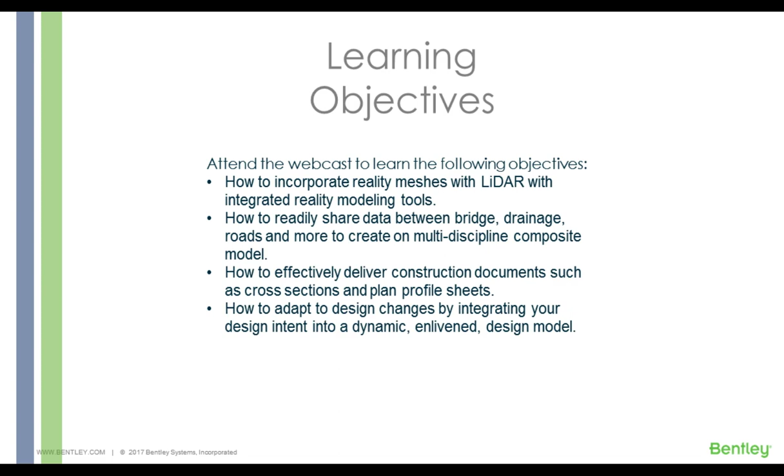Mo, I'll hand it over to you. Thanks, Bob. Well, first off, thank you all for joining us today to learn a bit more about the upcoming release of OpenRoads Designer.

OpenRoads Designer is basically taking the best concepts of our legacy products, InRoads, Geopak, MX, and combining them with the latest innovations to create our next generation detailed roadway solution. We'll take a look at the benefit of designing with reality context, rapidly modeling our design intent, integrating multiple disciplines, adapting to change, improving project deliverables, and easily visualizing our designs.

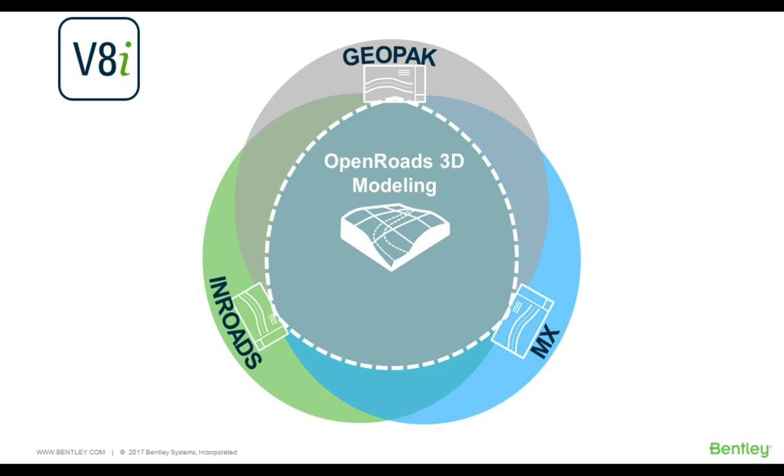Today, many of your organizations have to procure, deploy, and train multiple Bentley offerings to meet deliverable requirements. As you see in this graphic, OpenRoads Designer will be a single license, a single installation, a single solution that will simplify your process. OpenRoads Designer, above and beyond the premium civil products I just mentioned, will also include Descartes capabilities, the new gINT civil tools, SUDA, as well as MicroStation.

Joey will get in a lot more detail. We mentioned the critical business issues in the description, so he'll get into those and highlight them, but I want to discuss a few of those and how they support industry direction.

The first one we're going to talk about is design with reality context. You see big data, expanding data types, innovation drives change. The availability of data, the expansion of types of data, and one of the bigger ones is actually the ability of software and hardware to consume that data is really changing the process. And that last bullet, innovation drives change — one of the key things I thought about is, if it ain't broke, don't fix it. I know all of you probably do have some clients that are slow to change, but the industry is changing, and this innovation, design with reality context, is having a huge impact.

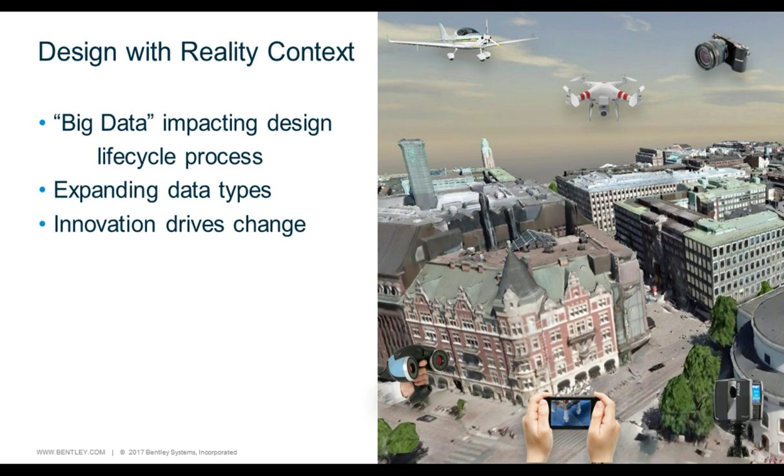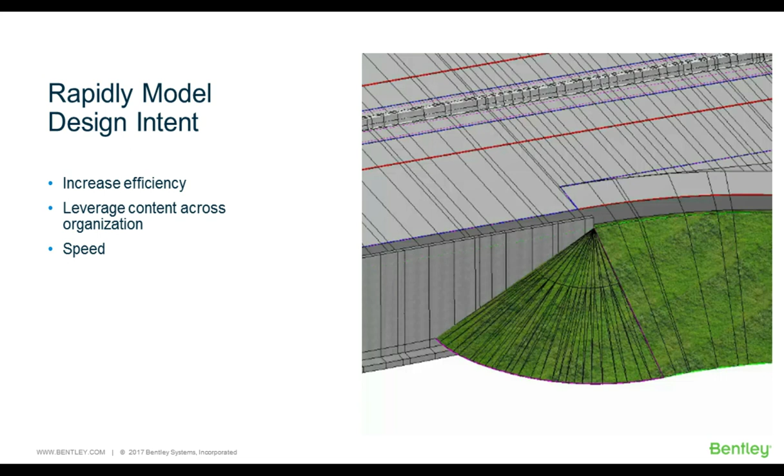Rapidly model design intent — this one is absolutely a necessity. A lot of people are concerned that there's a perceived impact to cost and schedule associated with 3D project delivery. Again, Joey's going to get into a lot of the detail of this, but this one again is an absolute necessity.

Integrating multiple disciplines - we've already talked about reality data, SUDA, the GINT civil tools - but Bentley's common modeling environment will also allow integration with things like bridge data using OpenBridge Modeler, rail, as well as buildings. This will ultimately improve collaboration, not only within an organization but with subs, owners, etc. It'll also reduce risk and find early conflicts, all benefiting the project through that integration.

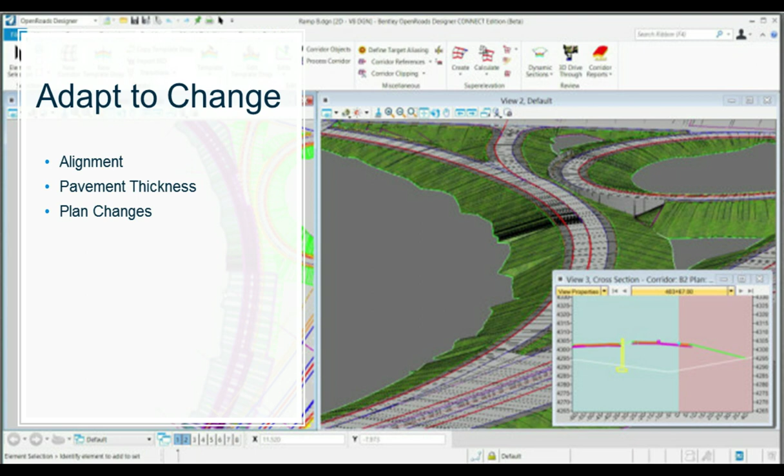Adapt to change - to me this is an extension of rapidly modeling design intent. But the big thing here is that it offers the ability to make changes without circling back to the beginning. So you're not having to redo work; you have to be able to adapt a change quickly.

Another big critical business issue is improving project deliverables. Regardless of whether you're working on a traditional design-bid-build project or alternative delivery projects such as design-build, CMGC, P3, etc., the deliverables - or rather the data - are beginning to shift from what we consider 2D plan deliverables to being focused on the data. That will be critical to the delivery and success of the project. We know plans will still be required, but some organizations have it in their vision as early as 2020 to receive no 2D drawings.

And finally, visualize designs - we need to be able to do that easily, quickly, and it needs to be the actual design visualized in real time. The cost to do some of these visualizations, and why they're being done, right now the focus is more around collaboration and understanding the problem, and again we believe that's a critical business issue.

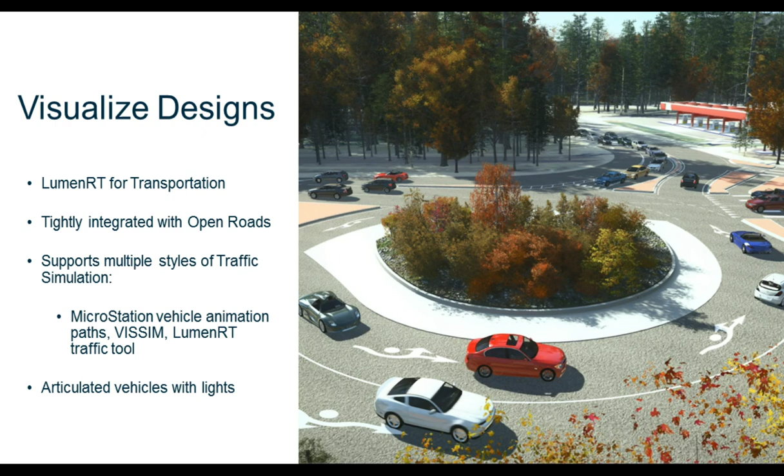So in an organization working between, say, your roadway group, your drainage group, and your structural group, we have to improve that process not just across phases but across disciplines. I've just covered these things at a very high level - these are some of the critical business issues we're focused on. It's all related to the industry, why we're doing it, why it's important to us, because it is happening. Now I'm going to turn it over to Joey.

Joey's going to dive a lot deeper into these critical business issues, and you'll see with OpenRoads Designer what Bentley's done to move that forward. So Joey, I'm going to turn it over to you. All right, thank you Mo, and thank you all again for joining in. As Mo said, I'm going to cover a little more of the technical side related to the business issues he's discussed previously.

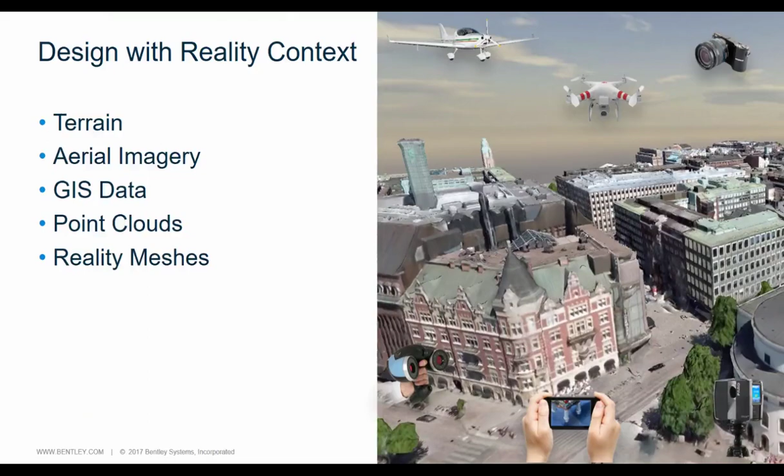So we want to first talk about designing with reality context. And reality context, if we look at that in a broad sense, really includes a lot of the things we've done in the past. It includes our terrain model of existing conditions, aerial imagery, GIS data, point clouds, and even reality meshes.

So OpenRoads Designer is built to be able to consume existing data from multiple sources so that you can access it, consume it, and utilize it when it comes to designing. You'll notice within OpenRoads Designer in the top left we have a menu we term the workflows. The breadth of functionality within OpenRoads Designer is quite large in order to provide a series of workflows so you can work on a project from beginning to end.

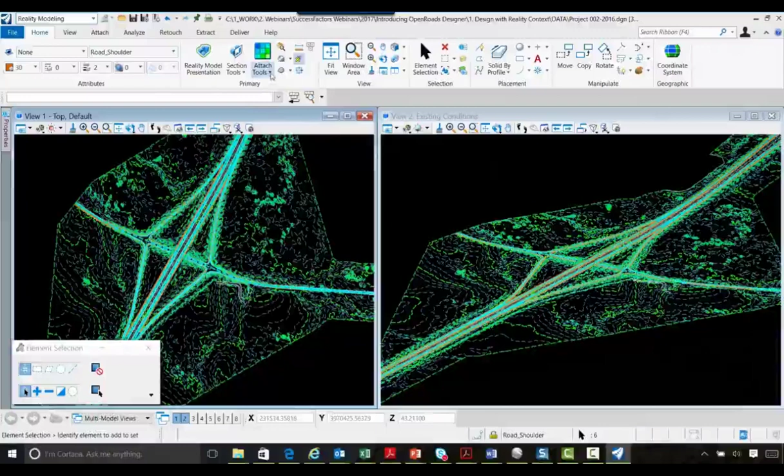Now we're focusing again on the reality modeling side of things, looking at some basic examples of how OpenRoads Designer lets us consume data. As a project's beginning, we have to have context of what's actually there. You can see the terrain model on the screen of the interchange where our project is going on, in the 2D view on the left and the 3D view on the right. As Mo mentioned, OpenRoads Designer and the industry at large has noted key benefits in working in 3 dimensions.

Now we've got 2 separate views. In the left-hand view, we're going to turn on aerial imagery. And all of this, again, is within OpenRoads Designer, and we're building the foundation of our project.

We see the terrain model. We've added in aerial imagery as well for a little more context and definition, so we've got aerial imagery in the 2D plane. Notice our 3D model simply shows the terrain model, so we're separating the 2-dimensional data from the 3-dimensional data. In one sense that's extremely useful and powerful, so you can understand the data easily and look at it in 2 dimensions or 3 dimensions in different ways.

Now we'll continue adding data. We're going to reference in a shape file so we can see the property lines, the right-of-way, and the boundaries related to this interchange. Many of you have probably experienced this quite a bit: as you begin a project, you're always on the lookout for data, whether property lines, terrain data, or imagery, in the form of shape files or other data types. OpenRoads Designer allows you to consume lots of data from lots of sources so we can put that data together in context to get a good picture of the existing conditions. So we've added in the imagery, we see the terrain model, and we've referenced in a shape file of the property within that area.

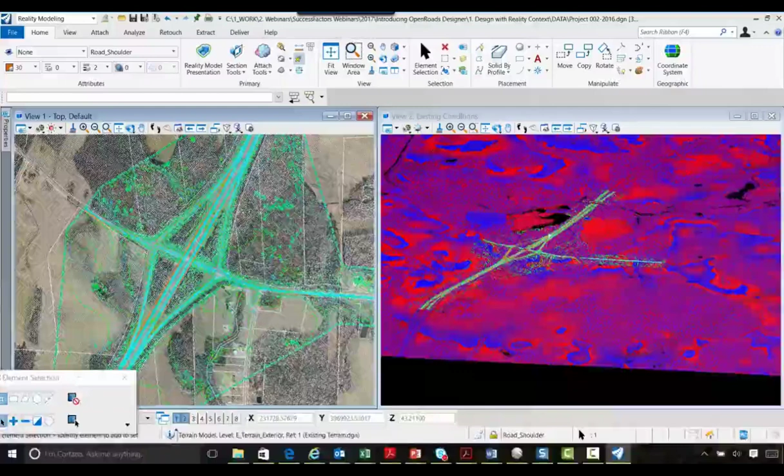Now we're going to continue and add in more along the lines of thinking 3D, so we're going to add in a point cloud file. The point cloud tool set is directly in OpenRoads Designer, and functionality for advanced tool sets, such as draping line strings and things like that, is included as well. Notice on the right-hand side we have a representation of the point cloud that's different than on the 2D view. So in the 3D model view, again, we can separate the data and get different perspectives of the same data so we can understand it better.

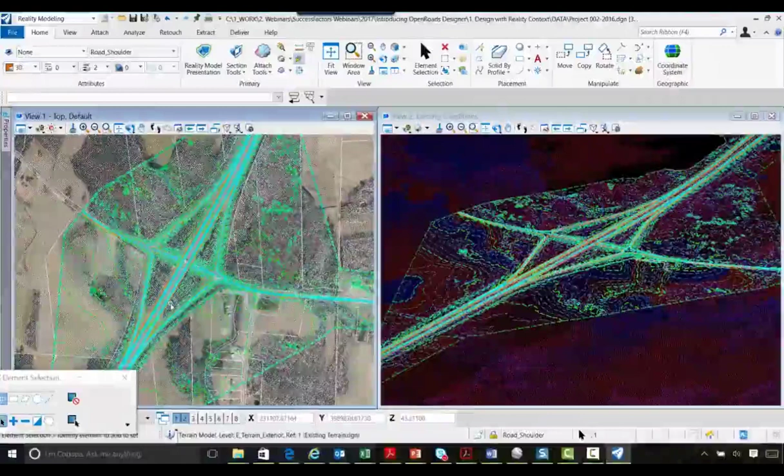Now we can just modify the views independently of one another so we can change the perspective a little bit to understand it better. So we've got that LiDAR file, point cloud is now attached. As I said, we can modify the views independently, so we turn off view 1, but we let the point cloud remain in view 2.

Now, in addition to just attaching a point cloud, there are presentation styles, so based off of that point cloud we can modify how it's displayed. Right now we're displaying that point cloud based off of an elevation range. You'll see here I'm making a modification of the data, and you'll see that change in the right-hand view as I modify the elevation difference and the colors as well. So we've taken that point cloud, brought it into OpenRoads Designer, and now we have the ability to analyze it and begin to understand maybe where the high points and low points are.

All that data is being consumed and put together so that we can understand it. So we've got imagery, we've got the terrain model, we've added in shape files, and now we are looking at the point cloud as well, and we can see that in the 3D view. We'll zoom out and fit the view just a little bit.

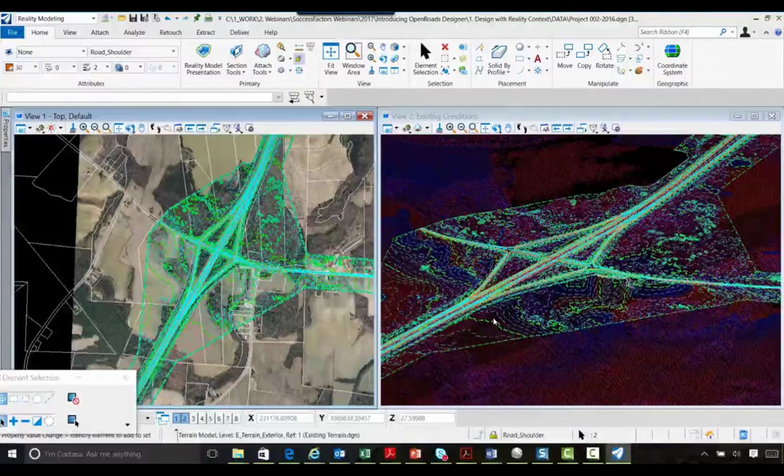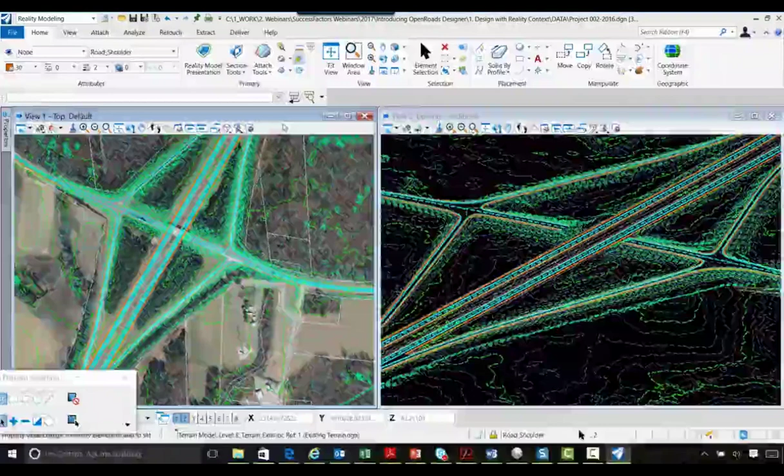Now we're going to add a little bit farther, we're going to add a reality mesh. The reality mesh is output from Context Capture. If you're not familiar with Context Capture, that's another product from Bentley where you can take imagery, either overhead from an aerial, or imagery taken from your cell phone, if you want to take shots of a head wall or something like that. Context Capture processes those and creates a reality mesh, which we are attaching here. Reality mesh is a .3mx file, so we just add that in with all the additional data.

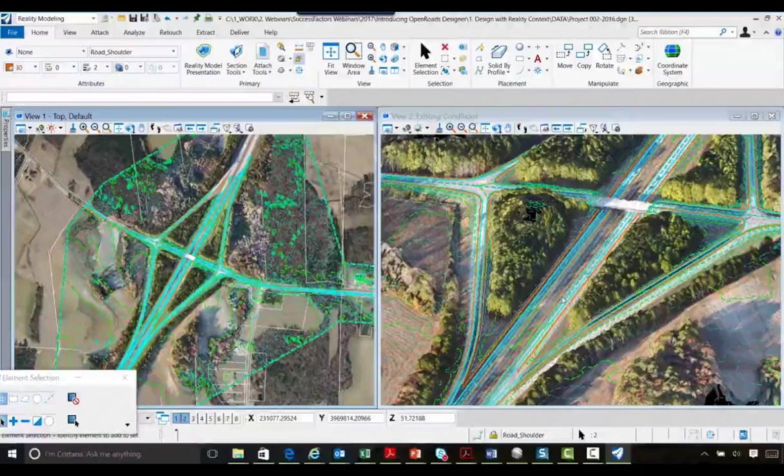We reference that reality mesh in, and now in both views we see the results. On the right-hand view, you can see the trees, the fields, and the earthwork around it, and we can just rotate that view to get a very robust, dynamic representation of reality at our project site. That again is reality mesh. The key thing here is being able to consume and associate all of this data together effectively, and not have to spend time manipulating, searching, converting, and translating data in order to get it all together.

When it comes to critical business issues, being able to rapidly model our design intent is key. Now, there's a perception that modeling requires a lot of extra effort and extra steps. OpenRoads Designer is built to model as you design, so as we model, as we design, they're really one and the same.

We'll take a look at some examples where design intent is included across all of OpenRoads, including alignments, corridors, intersections, drainage networks, and civil cells. The key thing to understand is that within OpenRoads Designer, and really this is a transition of the industry itself,

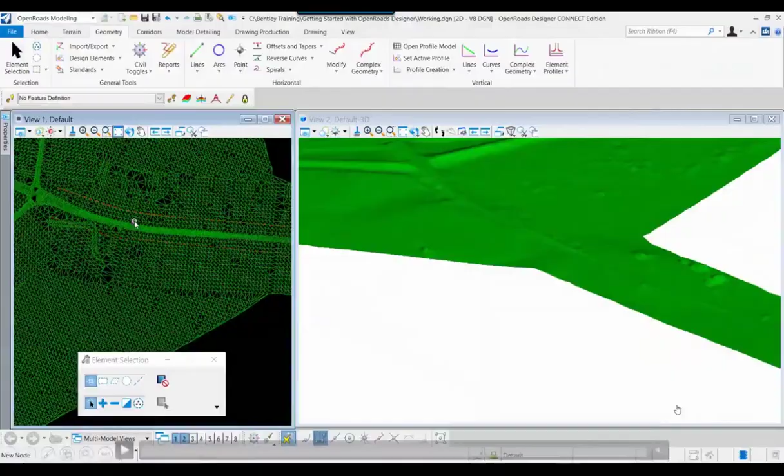modeling is not a post-process. Designing and modeling are the same thing. So in OpenRoads Designer, the intention is to model while you design or design while you model. They are really one and the same.

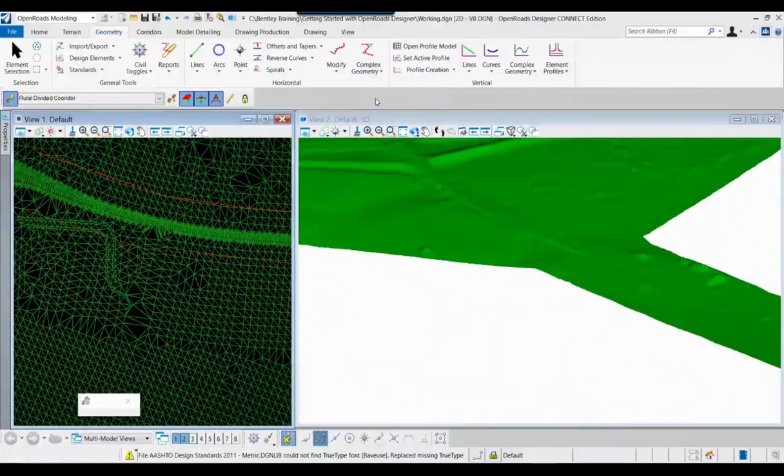Let's take a look. Here we have our terrain model, in the same area as before, and we're going to quickly model a 4-lane divided highway. On the left-hand side you can see the existing roadway, and we're going to create a 4-lane divided model, a corridor over the top of that. We want to be able to do that quickly, see it, evaluate it and analyze it so we can make engineering decisions as we create, as we design.

So here I'm quickly getting a centerline representation along the existing roadway. You'll notice I'm laying out the horizontal, but I'm producing the model at the same time, taking advantage of OpenRoads settings and feature definitions where I create the horizontal, vertical, and roadway corridor simultaneously. Now over in the 2D or 3D view on the right, we're able to see the representation of the model.

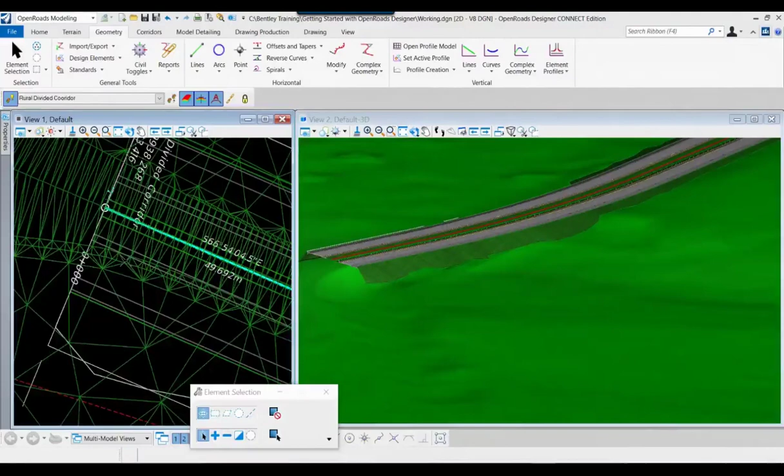We're not finished - that model is live and dynamic, so as an engineer I have the ability to make modifications. Here you see me modifying the start station a little bit - I just graphically move the location of the horizontal alignment and the corridor updates. The same for the horizontal curve - if I needed to modify that curve, I just graphically moved it, and you can see the representation of the model changing with it as well.

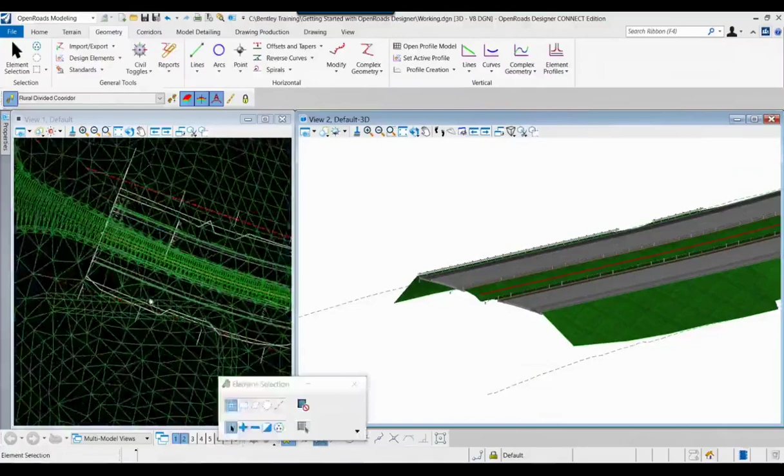As an engineer, as a designer, I want to see the results of my design quickly so I can analyze and evaluate it, and that's what we're looking at here. So I've turned off the triangles in the right-hand view. I want to clearly display those in multiple ways so I can analyze and make my engineering decisions.

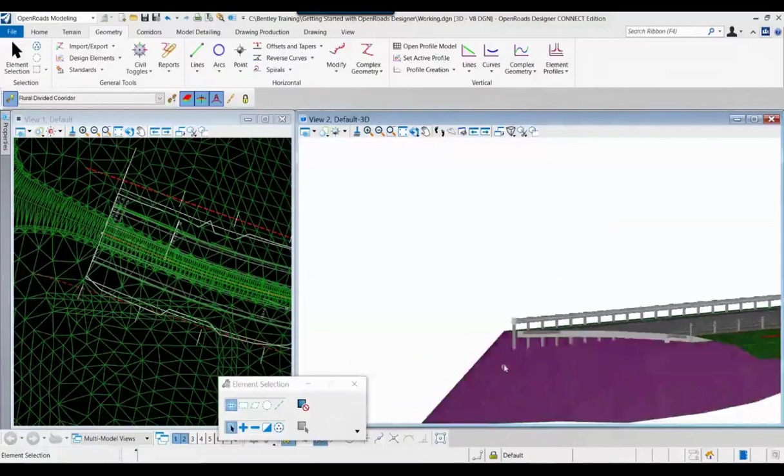If we zoom in on the model on the right, you'll notice there's guardrail and cable barrier present in the model. This is a very robust model - there are a lot of details included here. Notice too that the pavement buildup of the model is comprised of components - each of those pavement layers represents the constructible and quantifiable components of that corridor.

Interpretation and decision making is what we do as engineers and designers. So I'm able to dynamically and interactively work between the views to interpret, design and modify. We want to be able to convey our design intent within the model.

So I'm going to make a modification here. I don't like that steep slope along the left-hand side of the roadway. I've opened up the cross-section view, and I want you to notice that the cross-section view allows me to make decisions, to interpret that roadway corridor.

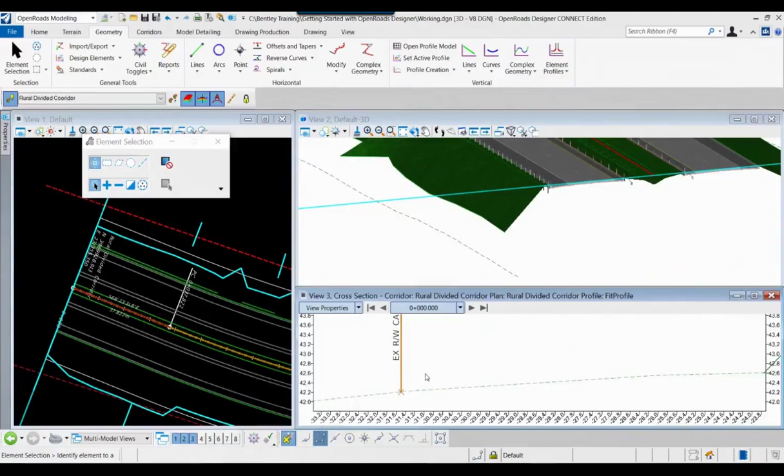I can see the barrier, the cable barrier, as well as the guardrail. Even the existing right-of-way is displayed in that cross-section. So I'm able to see that and make decisions from it. Now, in looking at that, I want to make some modifications, which we'll see later.

One of the key advancements within OpenRoads technology and OpenRoads Designer is using civil cells. Now here, I'm going to place an entrance or a driveway.

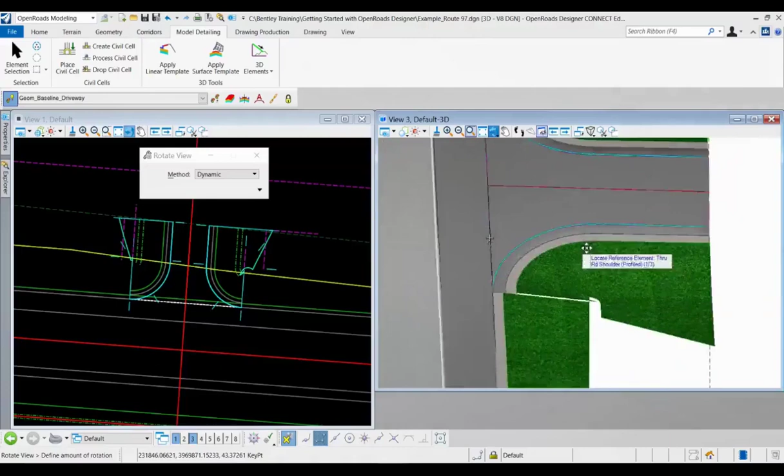I'm using a civil cell based off the references in my model, and I'm going to place that driveway entrance. We're able to place this quickly using that civil cell, which is really a pre-configured design element that carries and maintains your design intent. You see that entrance being placed over in the 2D view on the left as well as in 3D on the right, and it is now in the model.

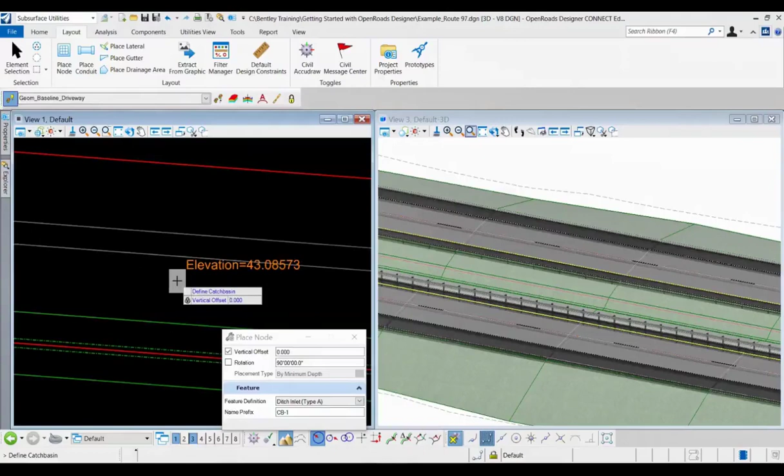Now we have that entrance associated with the corridor we created previously, all within a single design model. To take this a step farther, when it comes to modeling and designing and carrying our design intent, no project exists by itself. OpenRoads Designer has tools included for the subsurface utilities and drainage analysis tool set.

I'm going to take that same corridor and place a drainage inlet, and you can see that on the screen. On the right-hand side in 3D, we can see that inlet being placed in the bottom of the depressed median. Now I'm going to pan over to the north side and place the outfall structure.

I'm using the subsurface utilities within OpenRoads Designer, and I'm going to pick the proper head wall. It's got a 3-to-1 slope on that fill slope, and then I'm going to move over. Now I'm interacting with the roadway corridor.

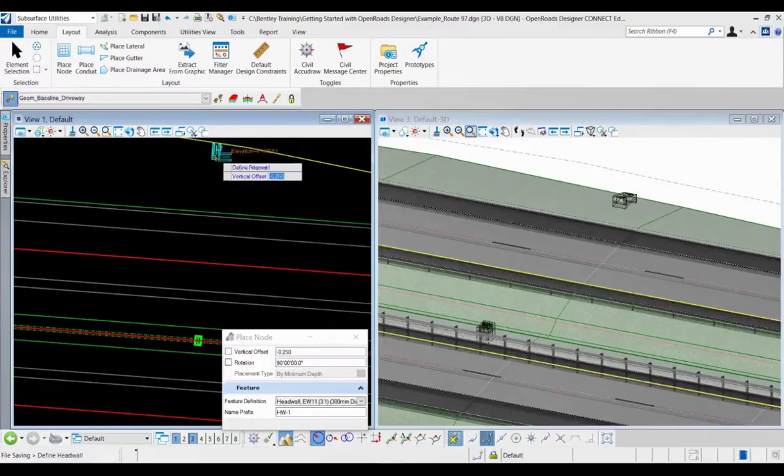When we talk about multidiscipline modeling, we're talking about being able to utilize data from other disciplines, such as drainage using our roadway corridor. Our drainage structures are relative to our roadway surface, so they're working together. We have the inlet placed and we have the outfall placed.

Now I'm going to connect them together with a concrete pipe. Again, I'm laying things out in 2D, and we see the results in 3D. So I'll connect those up, and now we can see those elements within our model.

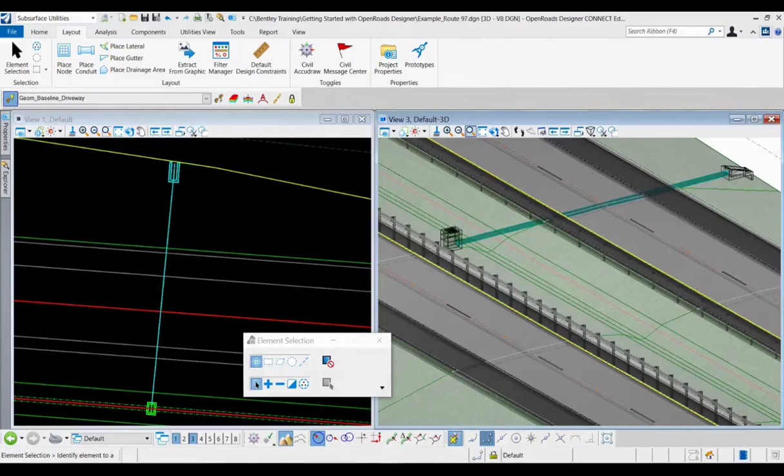This leads us into our next topic: multidiscipline integration, being able to integrate model data or design data from multiple disciplines. In this case, we placed drainage structures relative to our roadway design, and that data is not only integrated with it, it's interacting with it.

Let's take a look at integrating multiple disciplines in OpenRoads Designer. We'll look at several examples, including geotechnical data, bridge model data from OpenBridge Modeler, as well as drainage. This could include buildings and other structures as well.

If we're making design decisions within a modeling environment, it's important to point out that OpenRoads Designer really is a common modeling environment, so that we're able to exchange data and access and utilize that data when we make design decisions. That's really the basis behind integrating multiple disciplines.

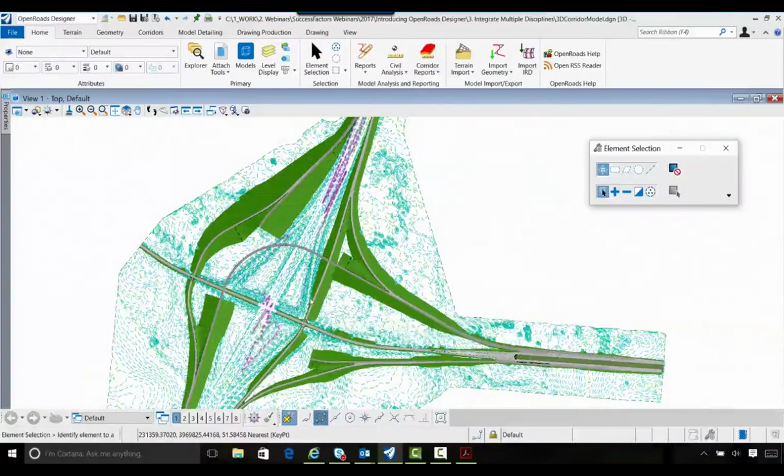Let's take a look. Here we are. We have just another example: the interchange here within the area that we've been working. You can again see the terrain model, the roadways, and the proposed roadway changes. We can rotate that up and take a look at it. You'll notice a couple of things.

Within this project, there are multiple keys or disciplines that we need to evaluate, and the first of those might be geotechnical data. OpenRoads Designer contains a geotechnical tool set called gINT Civil Tools. You can access gINT data and bring it into a DGN in three dimensions if you want. I'm going to reference in some gINT bore log data here into my design model.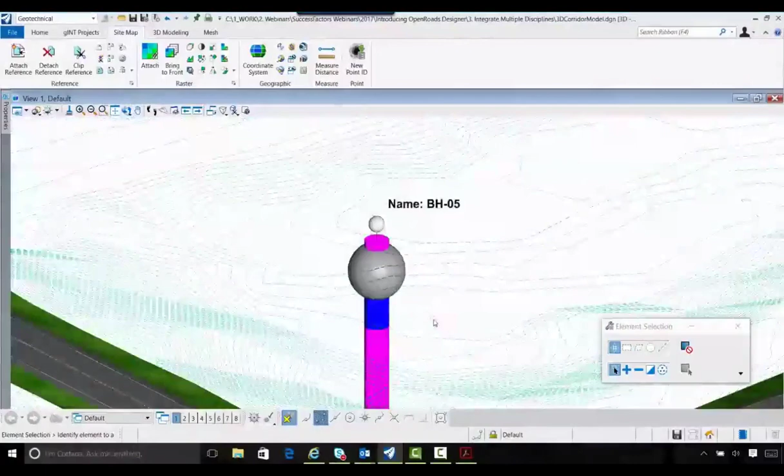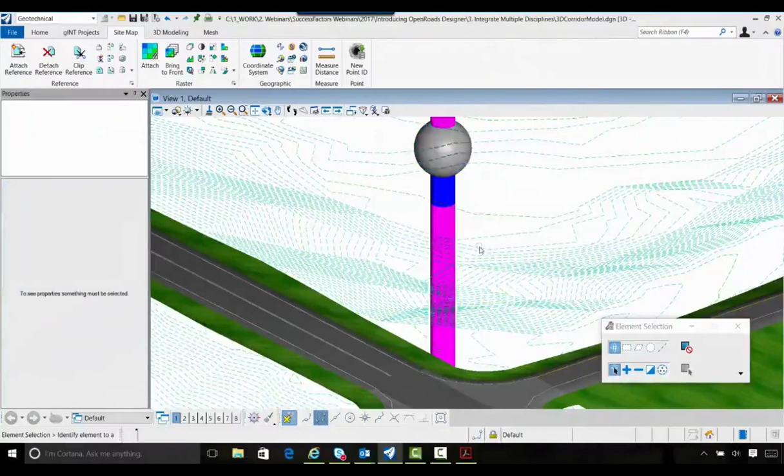Notice everything is geospatially located. So when we begin to bring gINT data in, it's geospatially located, and it's located correctly in elevation, so the elevations of all those logs are correct based off the material that it is. You'll notice you can select those bands, and the material is carried along with it. Rather than bore log information being on a series of paper sheets or PDF files in someone's desk drawer, we want to make that data accessible and useful directly within the model.

It's really a comprehensive modeling environment, so we have the ability to get a full picture of our project area and the engineering data that we need to evaluate going into it. Again, geotechnical data, we can bring that in. We also can access 3-dimensional bridge data from OpenBridge Modeler.

And so now I'm just going to select an OpenBridge Modeler bridge model and reference that into my project as well. And so you see the bridge being placed in the model. You can see that now.

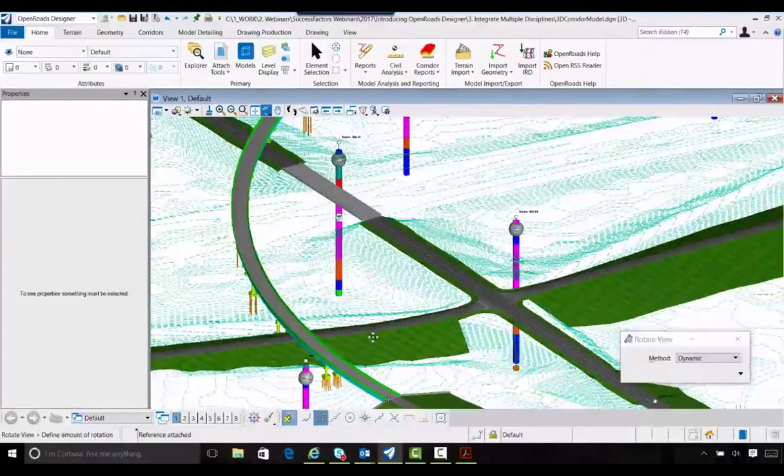Now at this point we have the existing terrain displayed, we have the proposed roadways, we have the geotechnical data, and we have a proposed bridge for the overpass, all displayed within a comprehensive, contextually correct model so that our decision making can be much better.

All right, so we see that model, and then of course we see a clear error here that we may have missed otherwise, that pier location happens to be conflicting with our roadway there. And so simply by putting those models together, we're able to see those issues earlier on in the process and hopefully catch them and make changes.

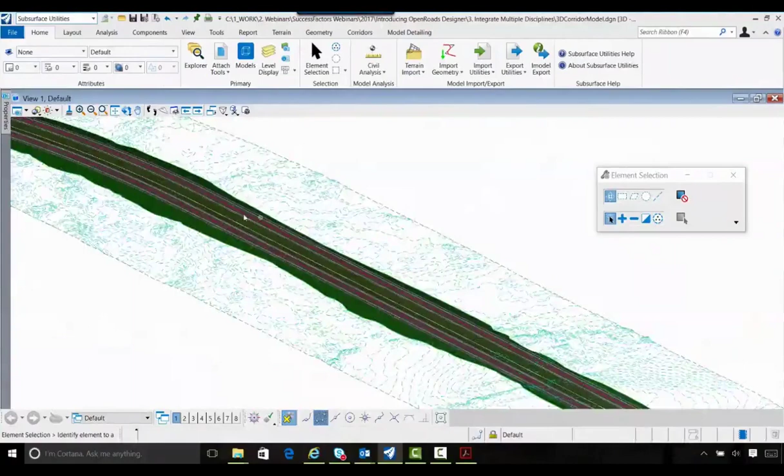Now finally, we have at this point, again, we've displayed the geotechnical data, we've displayed the bridge model within the interchange, and we've already seen a little bit of this, but I'm going to go ahead and pan down to another area of the project, and I'm going to just turn on and reference in a drainage model. Now, the point here really is to know that the data between disciplines doesn't have to live in one file.

So the drainage designer, the drainage engineer, could have used my roadway corridor, my drawing file, to create their storm drainage model, and I'm going to reference it back to my roadway model now. So again, we begin to collaborate back and forth so that we can view each other's work and make sure that we are working together so that our drainage structures aren't, the elevations aren't incorrect, and so forth.

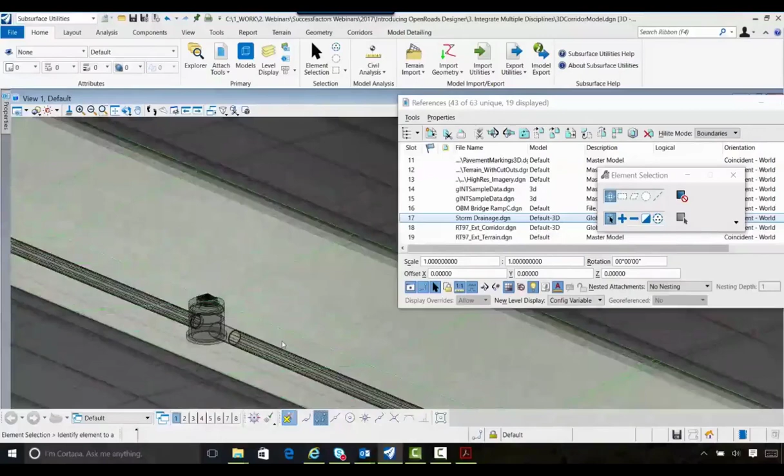So this drainage model was created by the drainage engineer, and I'm simply referencing it into my roadway corridor, again, to add a little more context so that I can evaluate and that we can be clear that our designs coincide and don't conflict with one another. And so there you see the drainage network going down the center line of the divided highway.

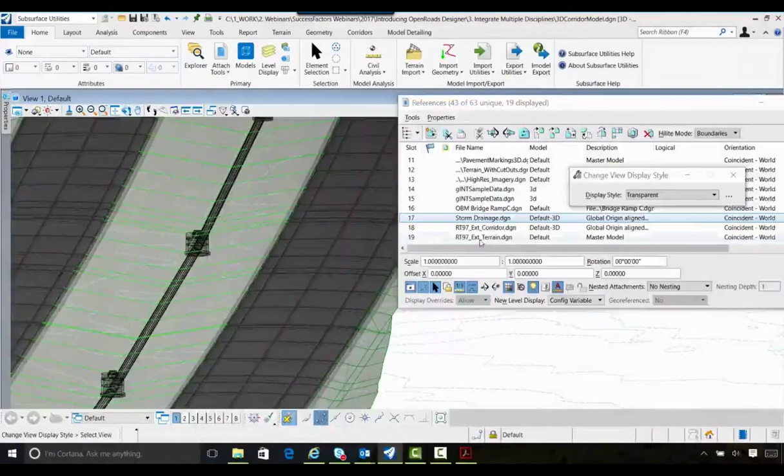Now I can rotate that view. I can modify the display properties of that view if I want. So if we want to see the drainage network more clearly, I'll just turn off the corridor graphics, and now we see just the drainage network itself displayed. Okay? All right, so that's integrating multiple disciplines.

Now let's take a look at really how all of these things, how they work together.

OpenRoads Designer is really model-centric in the way we do things. When it comes to project deliverables, including our plan sets, which we're going to take a look at, they really are dynamic, model-based plan production tools. Okay? So if the model changes, the resulting plans change as well.

In the OpenRoads modeling environment, again, there's several points that you see this throughout the product. One is, again, being able to model and interpret the model in multiple views, in multiple representations, whether you want to look at that model in a cross-section view or a profile view, or you want to rotate it to the front view or the side view or the bottom view, whether or not you want to clip at any point throughout the model. All of that is available to you because of the common modeling and the comprehensive modeling tool set within OpenRoads Designer.

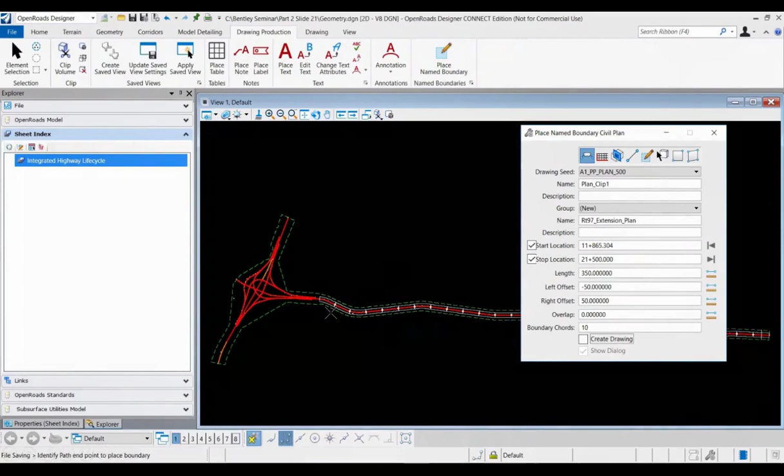Now, that being said, as we look at project deliverables, we're going to focus on the plan production tools within OpenRoads Designer. But again, they are model-based and model-centric. So let's take a look, first of all, at creating plan and profile sheets.

Now, within the same project and the same data set, we are going to basically define plan views along our corridor, and you can see those on the screen. So, working with the OpenRoads plan production tools, I've defined the plan views along the plan, or along the corridor, along the alignment, with a width and a length and so forth.

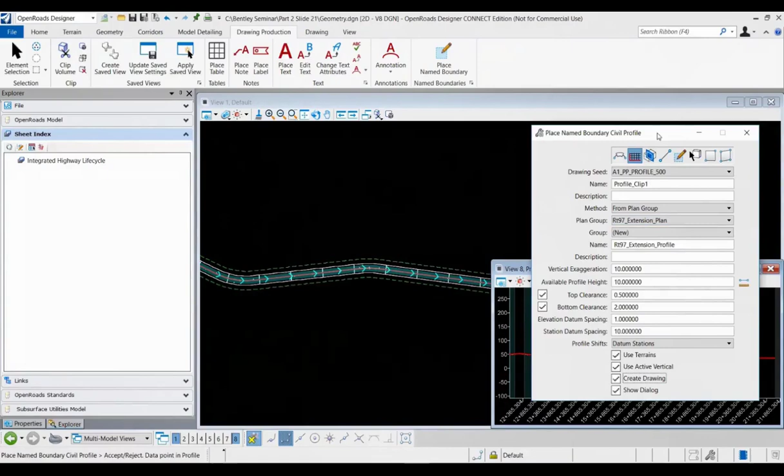Now I'm going to define profile views within the profile along that same project, along that same corridor. Now all of this data works together, okay? So we're going to change the plan, the name of this particular group, but it's all based off of the plan views we created previously.

Now within the profile view, and again this is a dynamic view of the vertical, I place those views, and now here I want to make a note. As I create drawings, make a note of the sheet index. And from those settings, which are, again, standardized settings that we've created for producing these sheets, we now can see all of the plan and profile sheets created. Notice the sheet index on the left.

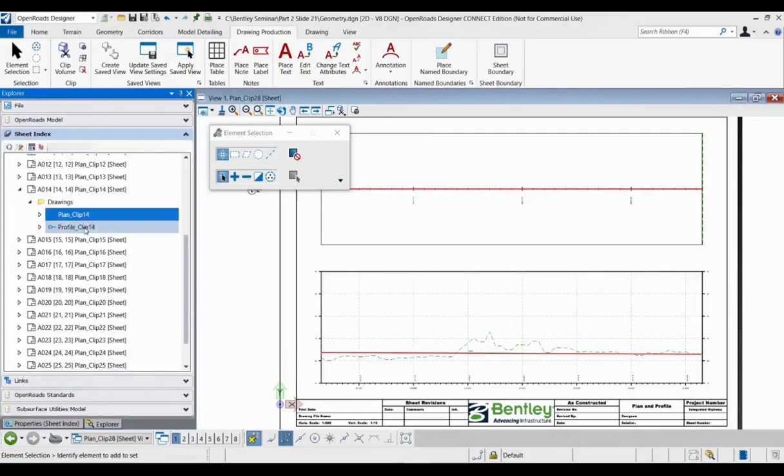We have access to all of these sheets, as well as the individual clipped sheet models from the design model. We can move through the sheet index and move from sheet to sheet, drawing to drawing as needed. We also have access to the individual sheet models. Okay, now that's plan and profiles.

For cross-sections, it's a similar workflow. We place boundaries along the roadway, along the alignment or the corridor, and we'll define the offsets left and right, station limits, vertical exaggeration and so forth. We'll quickly work through this dialog box, beginning by defining a start station and a stop station for this set of cross-sections we are going to create.

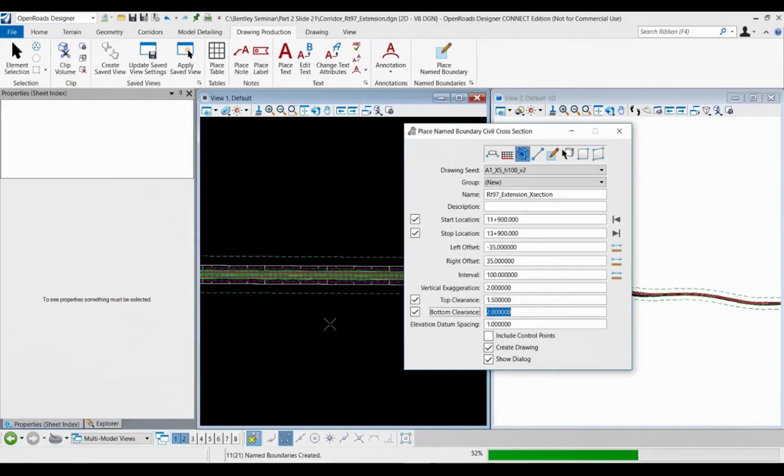Now, as we data point, the create drawing opens up, and notice we're adding these cross-section sheets to the index as well. Different sheets, different drawing files, but they're added to the same sheet index. So those will process, and now we can take a look at those cross-section sheets that were created from that roadway corridor model.

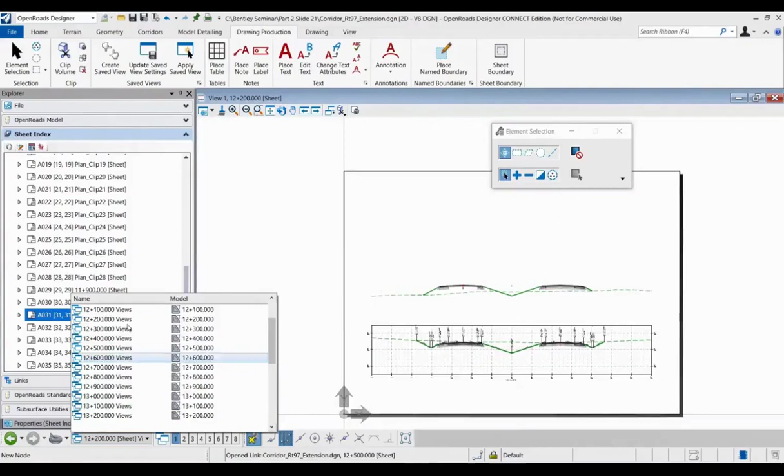Again, the basic premise is we have the model designed and created. We create views. Those views will then be put into sheets that we see now, and you can see the results on the screen. So those cross-sections from the model are all placed, and the annotation is placed based off of our standards that we incorporated when we created the drawing. And we can go back and look at the clipped sheet view, the sheet model that holds the data as well, and see cross slopes, elevations, and so forth.

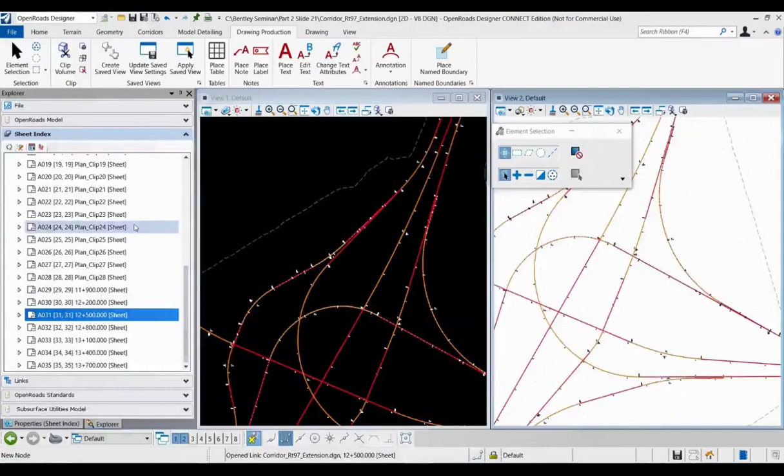Now, in the sheet index I mentioned before, notice that we are able to move - although we created them in separate instances and separate files - because they're added to a common sheet index, we're able to access the cross-sections and those plan and profiles in one place. I'm able to move between the model file, the design model, which you now see on the screen, and the individual sheets, whether plan and profile or cross-sections, in one location.

Now, from that sheet index as well, I'm able to plot. So I can selectively pick whichever sheets I'd like to plot. Here we're just selecting several of the sheets, highlighting those, and sending them out to plot as PDF files. Click OK there, and here we've opened up the resulting PDF file from plotting those individual sheets.

So in terms of project deliverables, I've focused here on plan production because I want to make this point. Plan production is still relevant, and the tools provided by OpenRoads Designer give us a tool set that's model-based, it's dynamic, and we'll see that in just a minute.

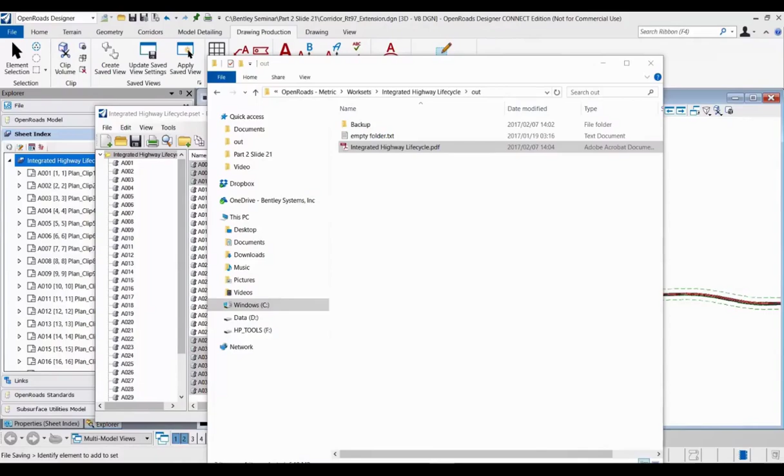So when it comes to adapting to changes as we design in the model, being able to see those changes reflected in our plan sheets is extremely important. The model becomes the heart, the foundation of everything - where we design, where we build our sheets from, and so forth.

I'm certain - I know we all have to adapt to change. This is a key component or element when it comes to thinking about critical business issues. Being able to handle change effectively and efficiently is extremely important.

So what we're going to do is take a look at OpenRoads Designer. We've already seen some basic changes where we modified the alignment a little bit, and made some slight modifications to the start station on our corridor. We also looked at where we moved the radius around a little bit, and saw the results from that as well.

Now here I highlighted several bullet points. The alignment changing - that's one element that could change within any given design. Safety measures as well; we'll see how we can make modifications in our design if we need to change from a guardrail maybe to a cable barrier and so forth. Design changes - there are always design changes, and those could be changing a side slope for safety reasons. It could be modifying the vertical alignment to get clearance in a certain area that we need, or modifying the depth of the pavement. And all those things happen all the time.

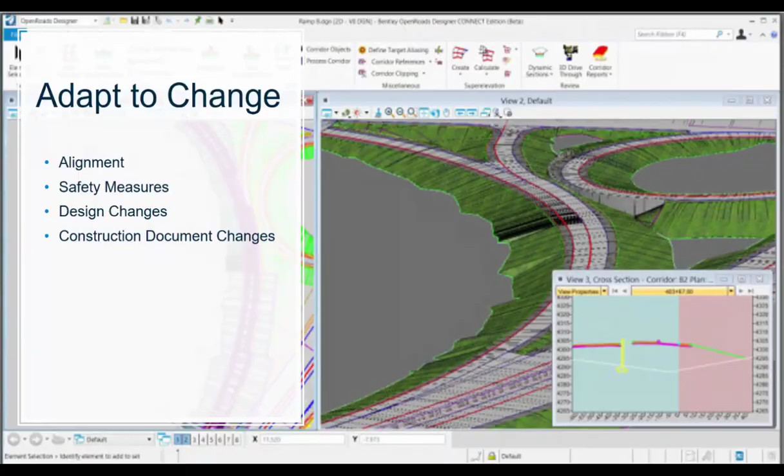And we want to be able to handle those effectively and have those changes effectively propagate throughout the design and throughout our deliverables. That's really at the heart of OpenRoads Designer and what our intention is. So we'll look at design changes - I'll give you some examples, and we'll look at construction document changes that result from the design model changes. So let's take a look.

All right, I'll give a little clarification before we get started.

We are looking here again at our corridor we created earlier on, and we can see the 2D view on the left. The upper right is the three-dimensional model view, and then we have the cross-section view in the lower right corner. Now we're going to make some design decisions in this situation.

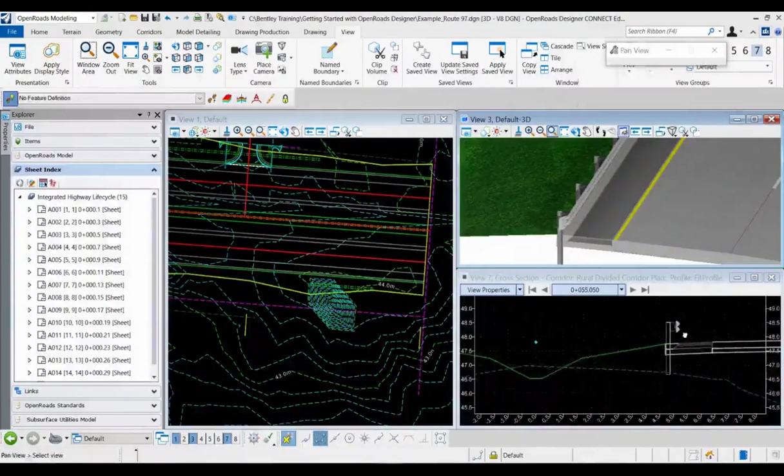I think it's extremely beneficial to be able to evaluate the data live. So maybe we need to modify that cable barrier and change it to a guardrail. I'm just browsing, and I'll select that three-dimensional feature in the model and change it from a cable barrier to a guardrail. Notice the change has been propagated in the model and into the dynamic sections. That's one type of change, a direct change into the model, and we see that propagated out.

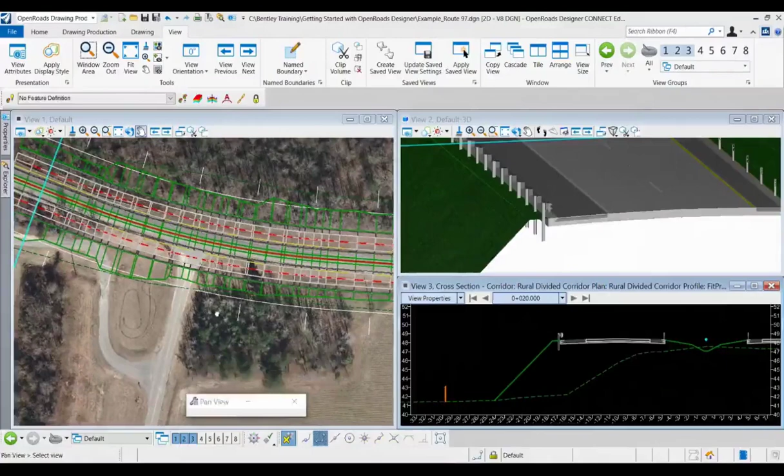Now a design change we might want to make, you notice that side slope's quite steep, but I still have quite a bit of right-of-way out to the north side of the corridor. So I'm going to modify that slope, flatten it down, and tie it to existing right-of-way using something called target aliasing. Target aliasing is extremely powerful. It allows you to take an end condition within your roadway model and associate it to anything, 2D or 3D. Now I'm going to graphically select the element that I want my end condition to tie to.

Now I'm graphically picking the right-of-way line in the 2D view. I'll pick that right-of-way line, click Apply, and then we'll see that side slope modification. We see it in the 3D model, in plan view, and in the cross-section. The side slope changed, and notice that the guardrail has been removed as well.

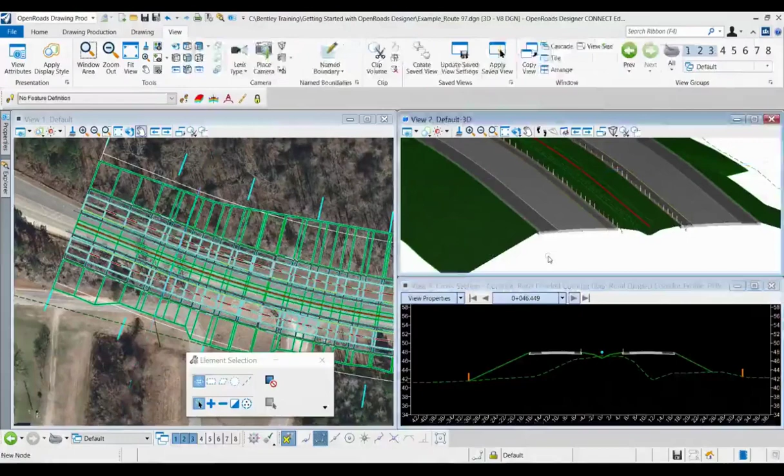So when it comes to modeling, design intent is at the heart of everything within OpenRoads Designer. When we make a change, it's not just a static change in a silo. We recognize how things are put together, how you've built each and every element, so that when you make a change, we maintain that intent that you imparted to that design. So again, this is just one example of adapting to change in a design modification.

Let's take it a step farther now and look at what that means for our plan production. In this case, I'd already created cross-sections of that particular area. We can see those cross-sections on the screen, and I'm going to browse now into the clipped view. You'll notice that the slope has changed.

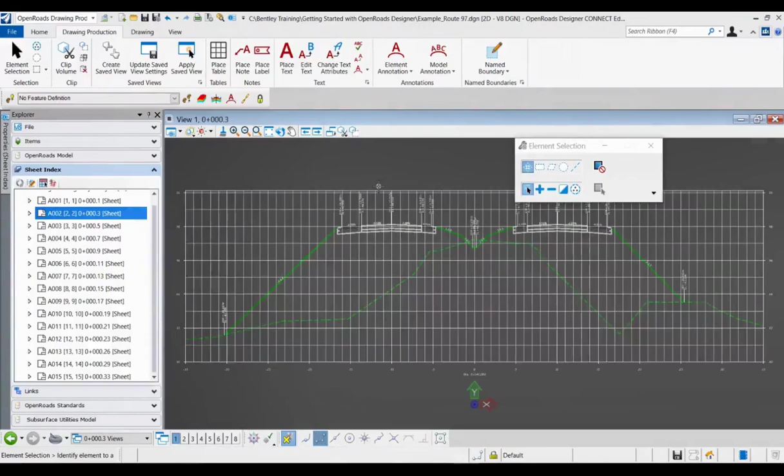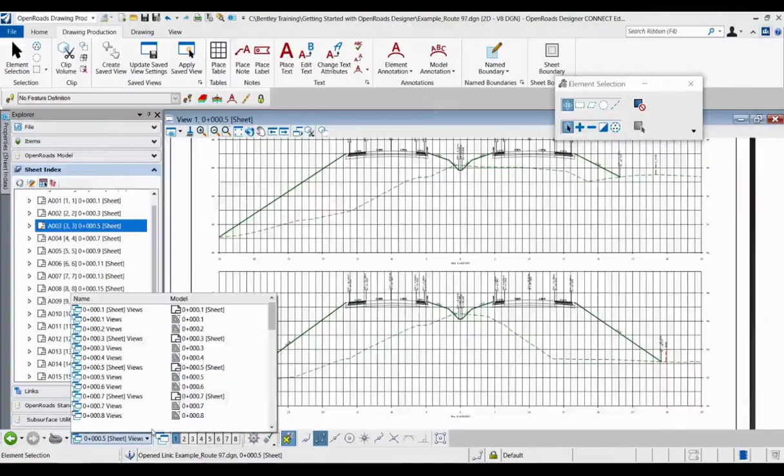Rather than being a one-to-one slope, it's tying down to the right-of-way line, just as I modeled it in the design model. Now what I'm going to do is just update the annotation within the cross-section. I simply removed and refreshed the annotation within that cross-section set. And now back into the sheets, you can see that the annotation has updated as well. We had a flatter slope and we had the annotation placed.

Now just for a second, let's take this a bit farther, okay? We've looked at what happens in a cross-section sheet when I dynamically modify the model. Those changes were propagated into that sheet. I refreshed or updated the annotation based off the model changes, and we saw that in the cross-sections.

Now when it comes to adapting to change, there's a multitude of changes I could have given examples for. We could have spent the entire session on adapting to various types of changes. In this upcoming example, we're going to look at profile changes, the vertical alignment changes, and really at several of the big impacts a vertical alignment change might have downstream on your deliverables as well as your design.

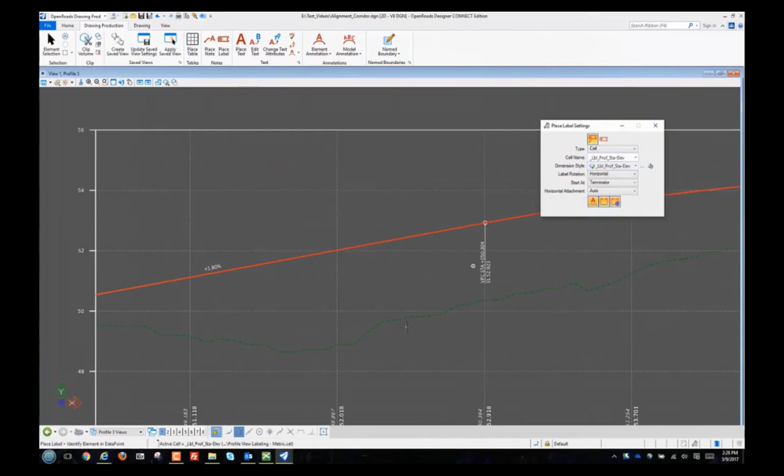So now we're going to first place some annotation. Again, we want to see the impact of model changes propagated throughout our design process. So here we're just placing a simple one-spot annotation along our vertical alignment, placing station and elevation at that given point.

Now what happens when we modify that vertical alignment? We've switched back to the design model, where we model, design, and engineer what we want to build. And now we've made the modification. We've changed that grade from 1.8% to 3%.

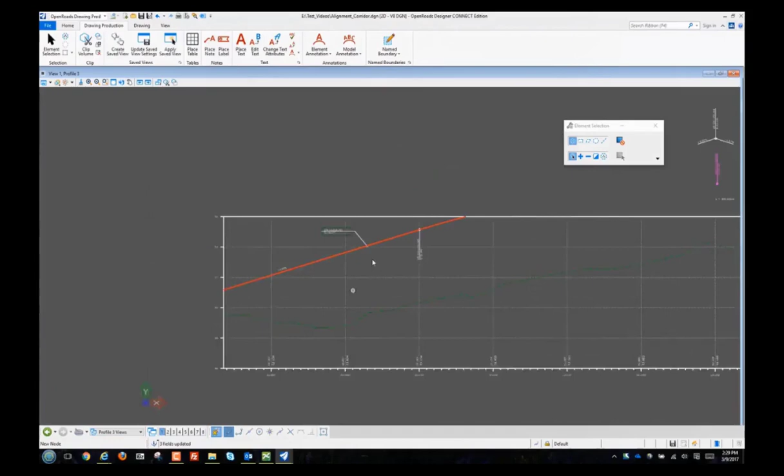Let's go back and look at that view. Notice the elevations for cut and fill have been updated. The slope is now 3%, and the station and elevation of our known point, our design point, has been changed as well.

That's one aspect: the annotation of that profile has been modified and changed. When we made the design modification of the profile, the annotation followed. What about the sheets? What about the predefined sheets I had already created based off option 1 of my profile? That's what we're going to look at now. How do I recreate or reclip, reassign, now that I have such a steep grade along this profile when it comes to building sheets?

What we're going to do is open up named boundaries. Basically, to simplify this, we're going to take that current profile view, our modified view, and recreate the clipped views along it, appending them—really replacing and appending them to the existing cross-section or profile view group. So we set up the dialog box.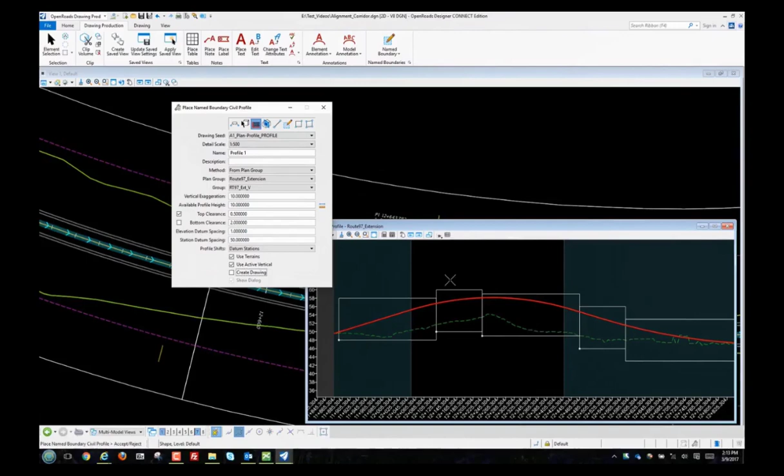We'll data point in the profile view, and notice how those profile views have reassociated to the new vertical, maintaining our design intent and our standards so that we have a minimum clearance along the top and bottom of the view. We have a set spacing from the existing ground to the bottom and so forth.

So even with a design change as drastic as modifying that from 1.8 to 3%, which in some sense may have wreaked havoc in some of our downstream processes, we're able, from a model-centric environment, to come back. Mo mentioned not having to redo things in a linear process. In today's world, working linearly from 1, 2, 3, 4, 5, if something changes at 5, we don't want to go back to 1 and start again. We want to make the change and have everything else come along with us. That's what we're doing here.

So again, based on that vertical change, we looked at the annotation following along, and then we looked at appending, recalculating, and redefining the sheet boundaries as well.

Just to catch us up here a little bit, we've looked at several of our business issues: integrating multiple disciplines, rapidly modeling design intent, modeling within an existing context, and improving project deliverables.

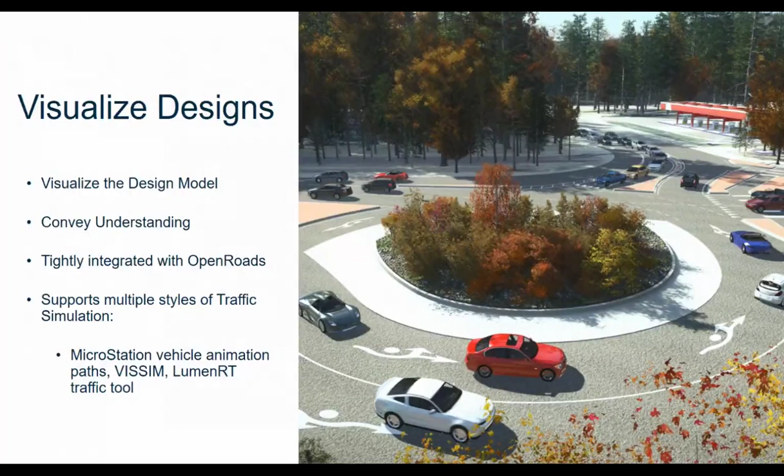The other point I want to make is that visualization is important, not—and you may have heard me say this several times—it's not necessarily a tool for communication, it's a tool to convey understanding. Visualization is a way so others can understand what your project entails: what the right-of-way, what the culvert, what the new driveway or the wider roadway is going to look like at their house. It's a subtle difference, but think about visualization that way.

Now, looking at OpenRoads Designer, we'll look at some examples. We have our interchange here. OpenRoads Designer includes visualization tools—really the same visualization tools you would have found in MicroStation previously: tools to animate cars, place three-dimensional elements, control lighting, and so forth. Those are all available in OpenRoads Designer. Let's take a look.

So on our Workflows menu, you can see the breadth of functionality in OpenRoads Designer. You'll notice across the top that tab. In this case, we're going to export to LumenRT.

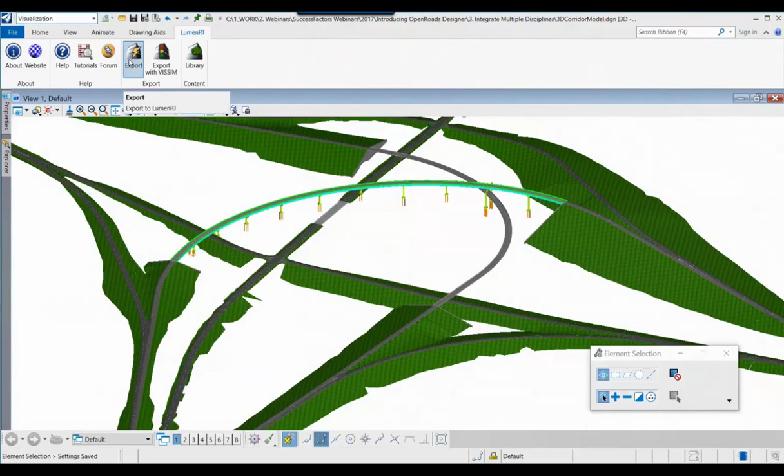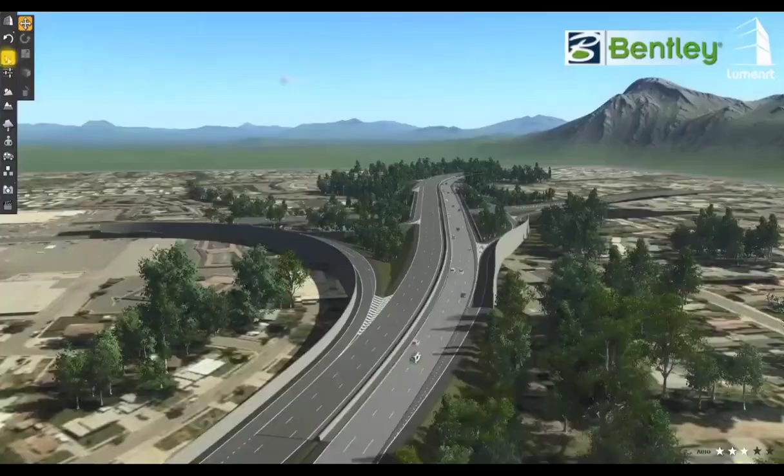LumenRT is a very direct and straightforward application for creating visualization and animation. Don't think about creating a separate model - your design model gets pushed out and exported to LumenRT. It contains functionality for placing trees, different types of materials, traffic, such as you see here on the screen - all of those types of tools to really bring your design to life and convey understanding to the constituents that are interested in it. That's what LumenRT is for.

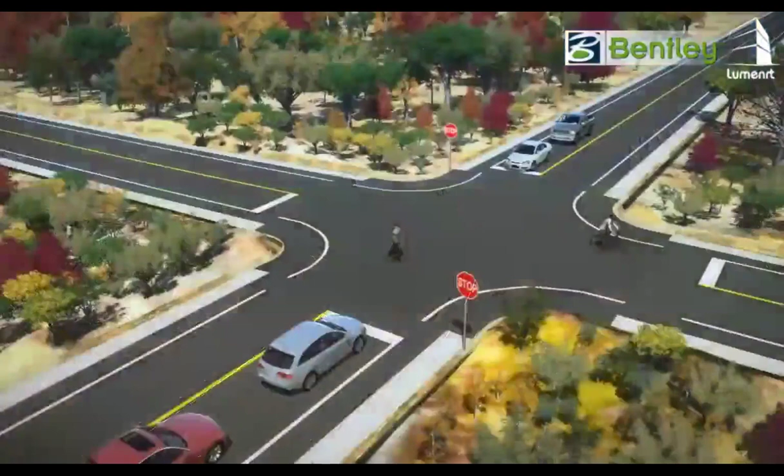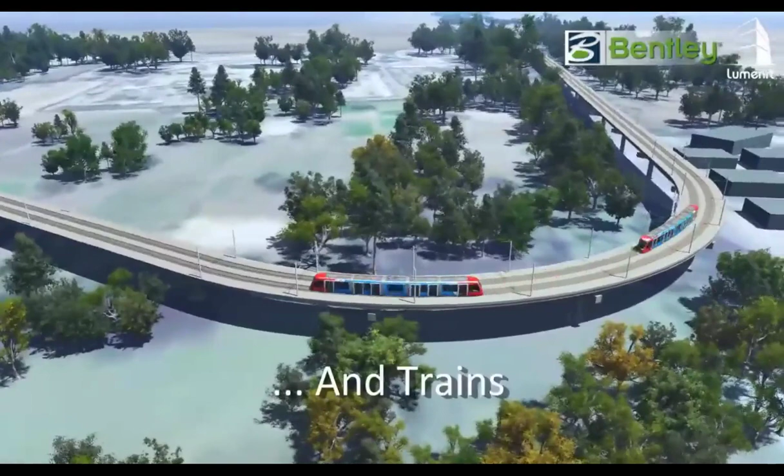So take your design model - again, we can place traffic and modify lanes. You can animate individual cars at particular locations if you want to highlight an intersection. And here you'll see an off-ramp with a truck driving around it. When you think about what can be gained by visualizing your design model, think about taking advantage of it. OpenRoads Designer really is built and intended so that all of these needs can be met.

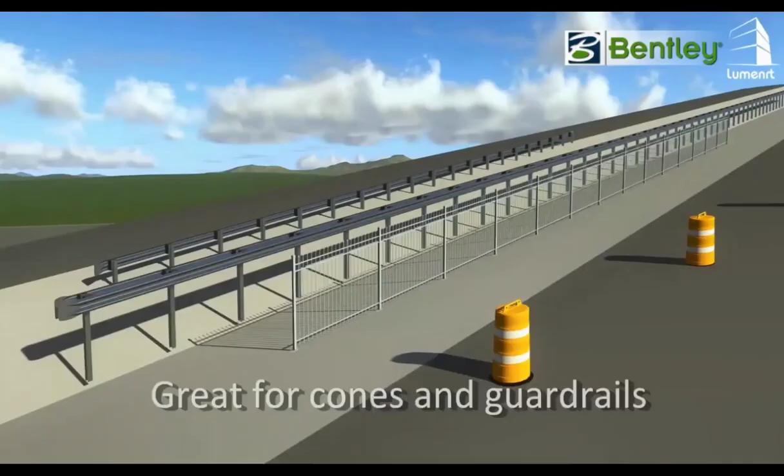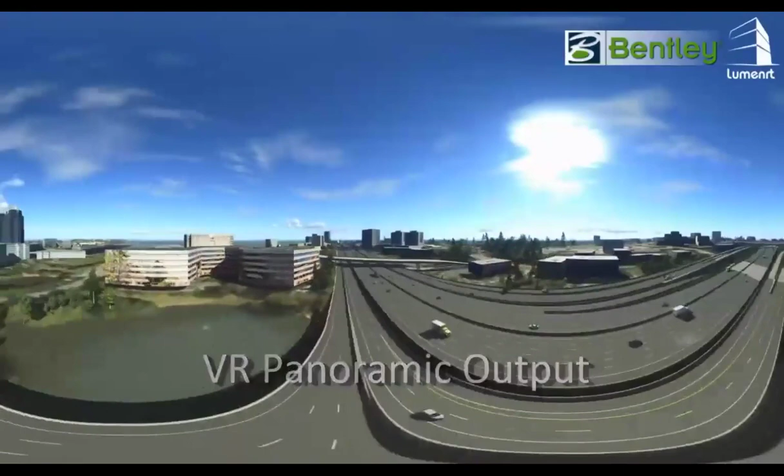Now, Lumen RT here we're going to show 3D line style support, meaning that 3D line style in MicroStation for a barrel or a guardrail or a fence or cones or anything else can be carried into Lumen RT. Lumen RT also has output for virtual reality - you can see that here on the screen as well. And here's just a flyover animation of a large project in Mobile, Alabama. And there we can see that as well.

Okay, now Lumen RT - so that is Lumen RT. And now...

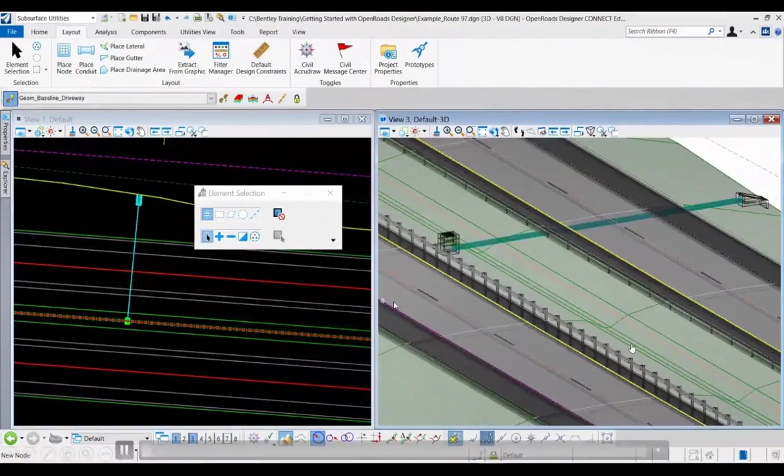One last point before I wrap up, and I would be remiss if I didn't mention this. In OpenRoads Designer, sometimes finding information may be a little difficult, sometimes searching for answers to questions may be difficult. OpenRoads Designer contains what we call CONNECT Advisor. CONNECT Advisor is really a search engine that searches across the Bentley communities, the Bentley Learn server, and Bentley's YouTube channel, and you can see those there on the screen. From the product, directly from OpenRoads Designer, you can open up CONNECT Advisor, as I've done here.

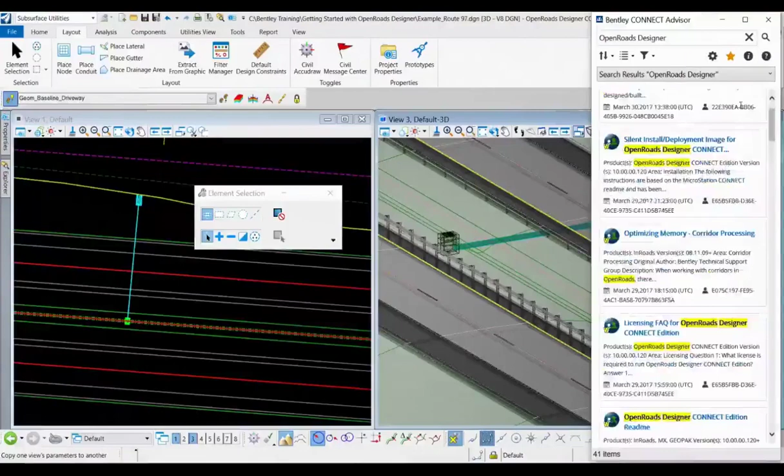You can search on specific topics. Here I'm just going to simply search OpenRoads Designer, and we'll see the content that's available to us from all of those sources. Again, Bentley Communities - we can see posts on the Bentley Communities Forum or the Wiki page. We see Learn server content, so we see on-demand classes that are available to us from that. And the beauty of it is it's all in product - no need to have multiple favorites in Outlook or Internet Explorer. We want to make that easy to find.

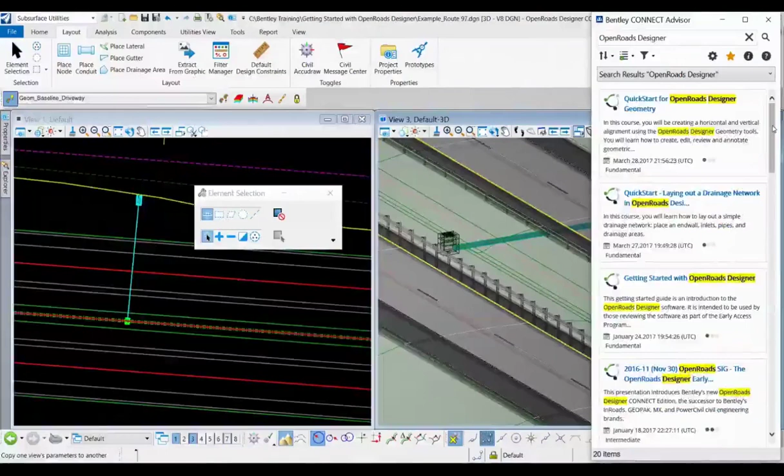So now I've searched on the Learn server, and you'll notice there's several classes available for OpenRoads Designer already. This to me is extremely useful - I don't just see that there's a class available, I can access it directly from the CONNECT Advisor in the product. So I click on it, I'll notice the on-demand videos present on the right-hand side, and I can access those videos directly in the product. I'll just click on that, and it opens up that on-demand session related to that topic within the overall class. So you're able to find it, access it, and utilize it all in one place.

Okay, and that is CONNECT Advisor. It is included in OpenRoads Designer.

And finally, just to sum everything up, we've covered quite a bit of ground, but I hope it's been useful to you. We've looked at designing with reality context, rapidly modeling design intent, integrating multiple disciplines, improving our project deliverables while adapting to change, and finally producing or visualizing designs. Again, all of those critical business issues are part of OpenRoads Designer. So again, I hope you found it useful. Thank you for attending, and Bob, I think I'll turn it back over to you.